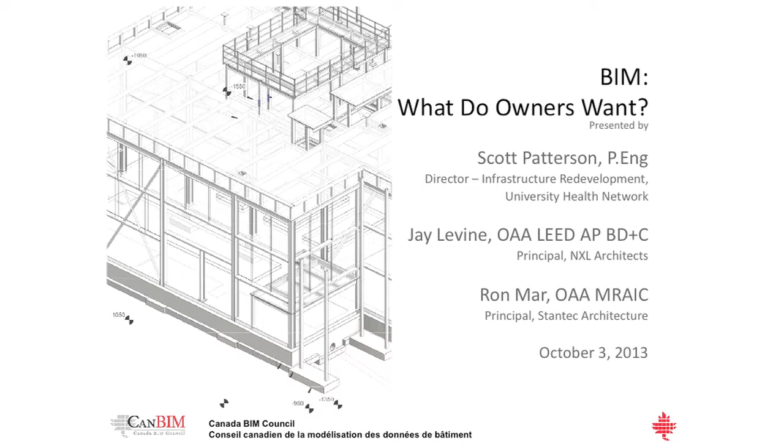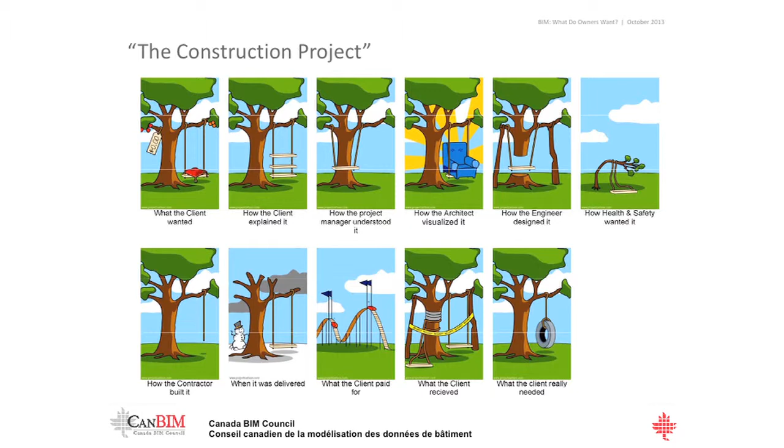I want to start with this old slide, and I'm sure many of you have seen this on the internet many times. It's been used from the PM Institute, about the disconnect between what the client asked for, what they want, and how everybody along the way interpreted it. One reason we get there is that we don't do a good enough job of explaining ourselves. Now BIM is a great tool to explain what it is we want, but you could flip that same slide around, and this just says what the BIM model is.

We find that happens a lot: when I, as the owner, say I want BIM, what does the architect hear, what does the contractor provide, and what do the facilities guys think that means? So I thought it would be clever to show you how that could be a double-edged slide.

Before I go too much further, I just want to get an idea - so I'm up here speaking as a client. Is there any other owners or building operators in the room? Just a couple? I thought I could be the guy that could speak for all owners, but I can't really. Somebody's going to keep me in check. I see one building operator in the corner. What architects? How many? Contractors? A few? And everybody else, I guess?

Right, okay, so let's have some fun. A little bit about who I am.

I work for UHN, University Health Network. We're a hospital organization here in Toronto. We have 4 hospitals across 8 sites and a total of about 6 million square feet - 2 million lease space and 4 million of our own properties.

We are committed to BIM, although we're just getting started, because we feel it will definitely improve our record keeping, help us plan our projects better in the future, find things to help us make improvements for energy cycling, tell us about what our buildings are doing, and the last great thing - reduce costs because we're going to reduce our risk.

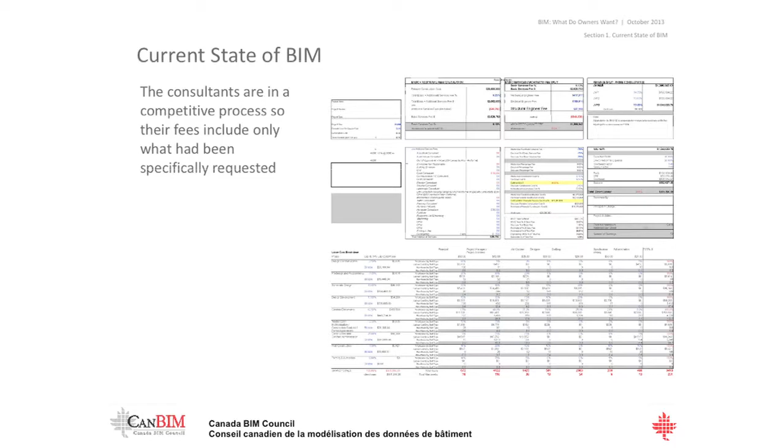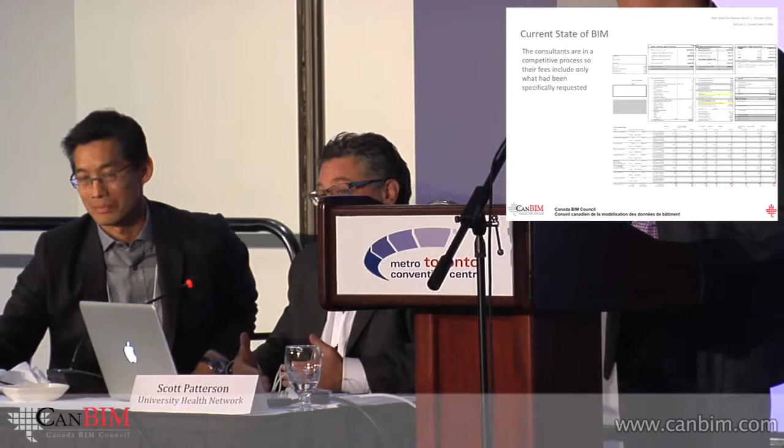So when design consultants who are pricing something competitively see that, we say, just like the contracting community looks at our documents and says, if it's not there, we're not pricing it. We say, if it's not there, as we're trying to figure out our fees and model this big team of civil engineers and landscape consultants and code consultants, and put all that together in a fee model that's supposed to leave us enough fee to last on a project for 6 years, BIM's not part of it unless it's specifically asked for. And we have yet to see it asked for with any specificity or with any degree of clarity.

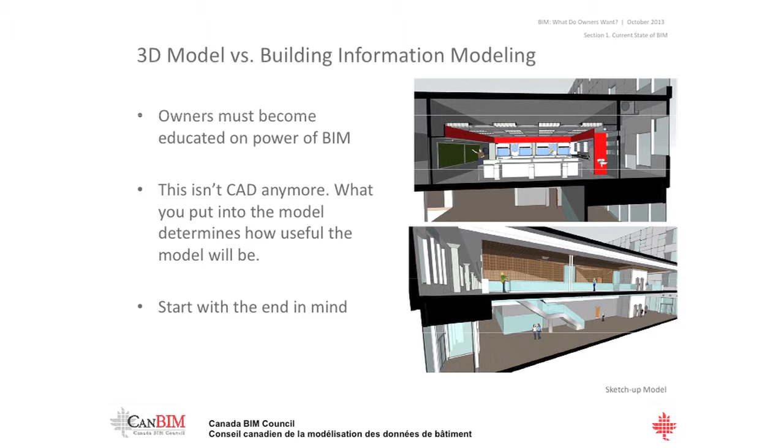So basically we know now that the owners have to become more educated with BIM, and if there's one thing that the last project has taught me, it's how much I didn't know about BIM, and I'm learning every day how much more I don't know about it. But this isn't CAD anymore.

The pictures you see on the side of the slide here are really just SketchUp models, pretty pictures. And I know a lot of people, at least on my side of the industry, think that's what BIM is - we're going to have a nice three-dimensional rendering of the drawing, we're going to be able to see the colors and see what the carpet is. That's useful for maybe a marketing point of view, but it doesn't get us anywhere near where we want to go.

And what we have also realized is you have to really start with what you want at the end when you start the project. We didn't realize that at the onset of this last project, but now we know what to do next time. So what do we want? Not sure I even know it all yet, but we're going to try to go through some of the items.

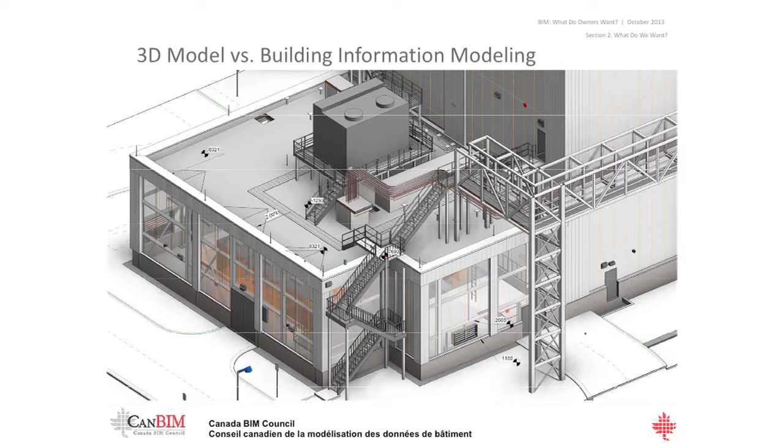What this slide is meant to show is, yes, it looks like just a pretty picture, maybe like a SketchUp, but there's so much more to it than that. Aside from the fact that it's got pure, accurate geometry and the information is actually there, you can go down deeper and pull away things and look at the structural, the nuts and bolts.

Most of you people in the room, this is not new. I'm not bestowing any new information on you guys, but it was quite an eye-opener for us to know that it's more than just something you can do a fly-through with, or show a donor, or do something like that. How many times did we ask that, Ron?

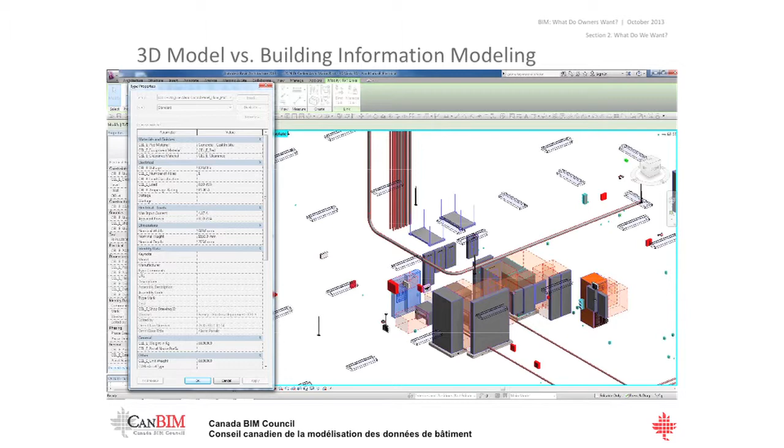A lot. But to the next stage, this is just to pull out purely electrical information of a part of the building, and then have the data on the side that shows all your information about what type of light fixture that is, where do we buy it from, can we have a PDF of the cut sheet for our facilities guys, can we have our maintenance operation manual embedded in this.

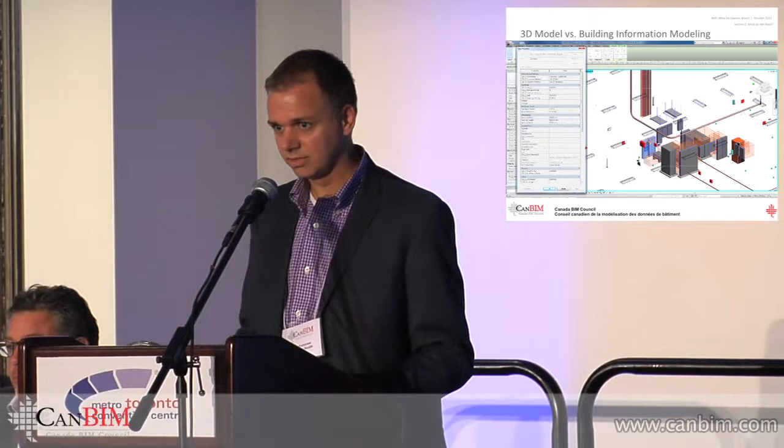That's the power that we now realize at UHN, that's something that we can grab hold of and do something with. The picture is great, but it's for after the life cycle of the building - know that light is from Lutron, and this one is from such and such, and this is how we got it, where we got it, and this is where we can get another one when it breaks down. To have that all in one big place, as opposed to my previous slide where you get the manual, throw it in the drawing room, and good luck finding it afterwards. So that's where we really see the things are going.

Some people in this room may know a fellow named Ian Trudeau, who probably takes a lot of credit for this drawing, when this is a structural part from our last project. But there's more to it than the construction interface and the clash detection, although this is - Ron, do you want to talk a bit about it?

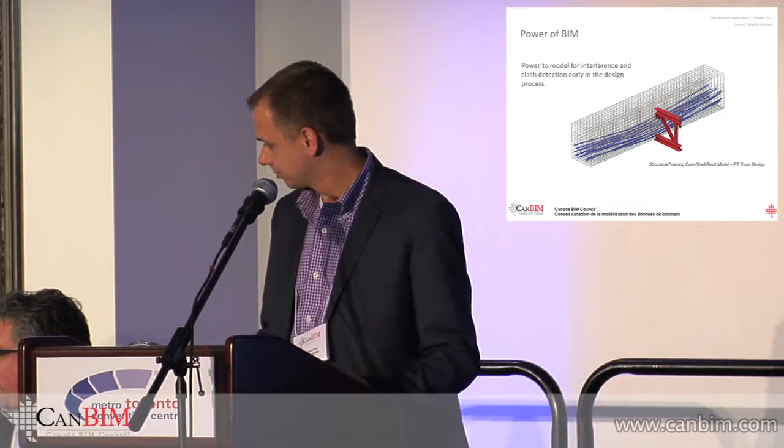Just also to step back, just to set the stage in this - Scott's describing a future wish list, and we're also looking at a bit of a history case here.

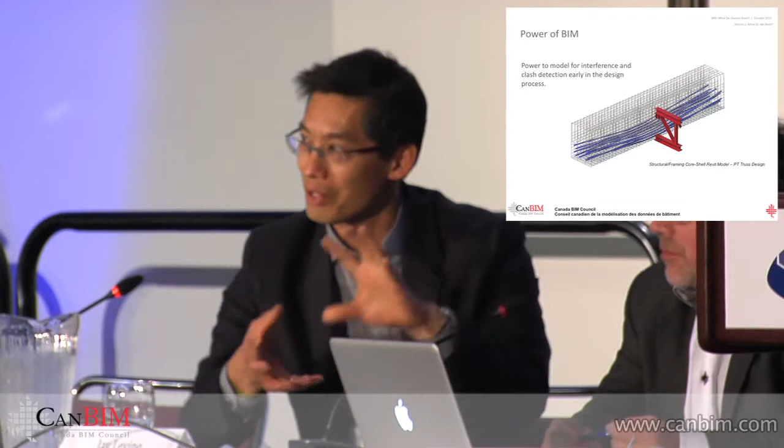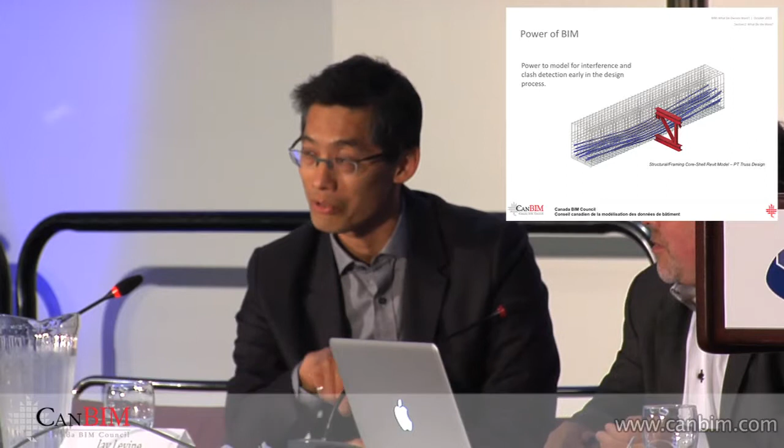Ian and Jay and I spoke a little bit about this project, the Krembil Discovery Centre, a couple years ago at another talk, and it was maybe a bit more. At that time we spoke about the process and what we did with the BIM model. In the context of what an owner wants, I think these next few slides are about what went on with Krembil, because I don't think we're there yet. There's a bunch of guys in this room, some people from EllisDon and Black & McDonald here who are also part of this project, so some of this is not new to them, but this first slide is literally just a design collaboration idea.

Early on with the Halsall Revit model, we needed to look at a lot of major structural and mechanical interference issues, and this is just one of their crazy Revit model diagrams looking at this gigantic concrete transfer beam and a post-tension condition we had to deal with. As architects, we wanted to see how many holes we could put through for sleeving in terms of getting our mechanical systems through. But this was just a design element in the process, and we can skip through.

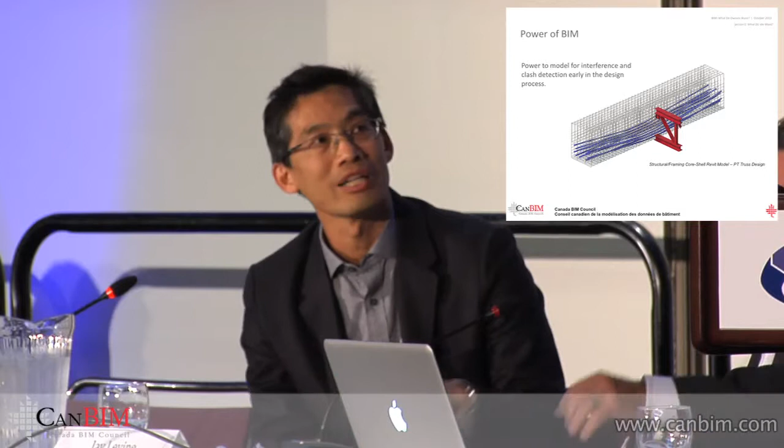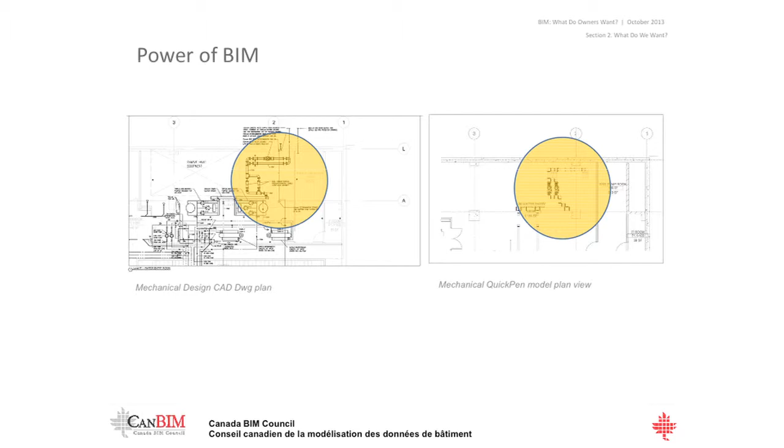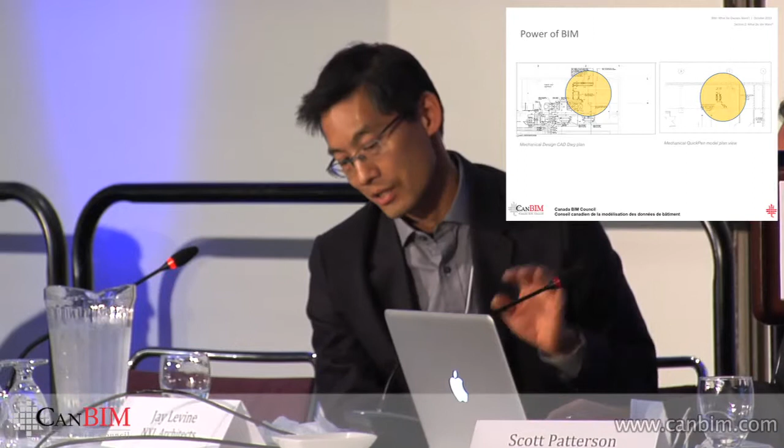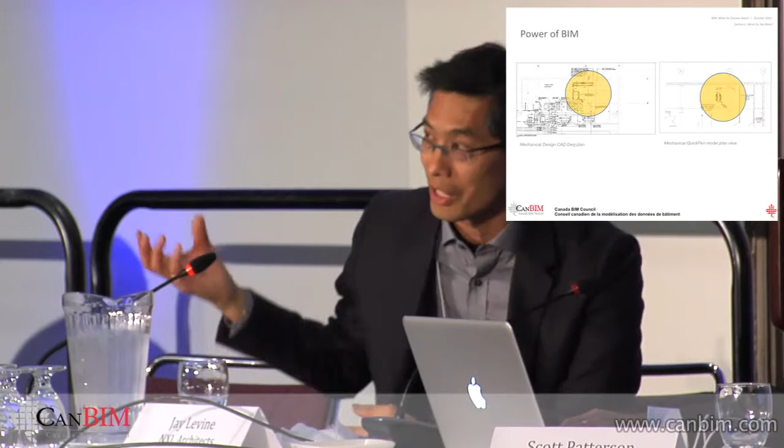The next one, you won't be able to see anything in this, but I'll step back again: the mechanical and electrical design team didn't embrace the Revit model on this project, so the structural team and the two architectural teams were working that way. This is a slide of sort of halfway to the proper way of working, where the left image is just the mechanical design team's CAD drawing of a particular element, and then what the Black & McDonald team and EllisDon were starting to do was look at bringing that missing BIM model component into it, and I think they were just using QuickPen at the time to develop a model.

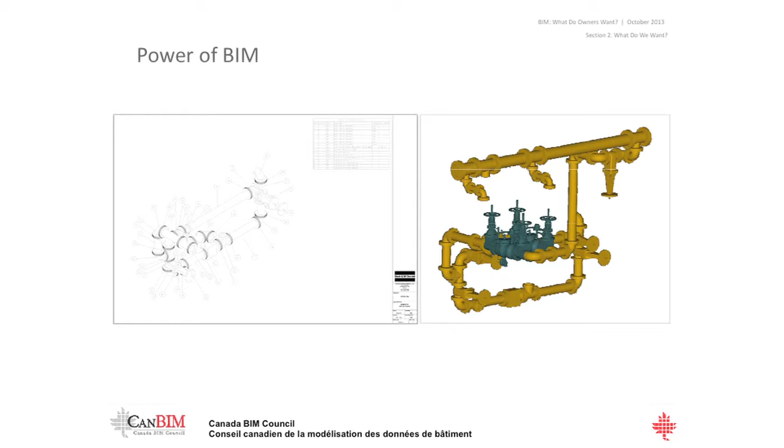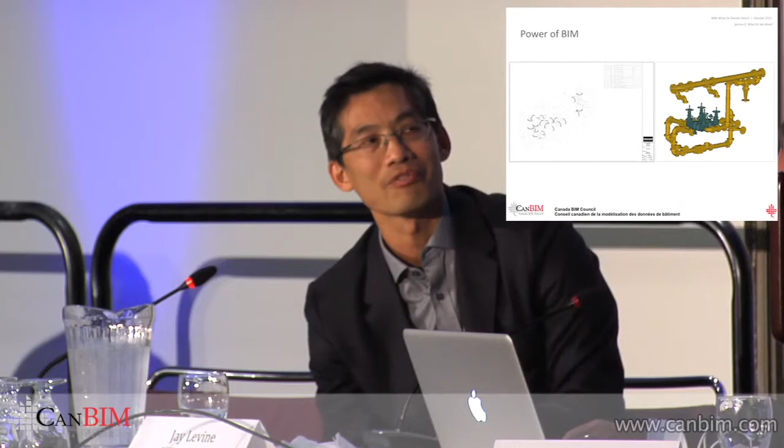Then leading to this spooling diagram, you probably can't see anything on it. It's a black and white spooling diagram on the left of this particular pump and pipe fitting array, but with the 3D model on the right, and that's where we want to get to. This is easy - the design, the fabrication, the construction, sizing, and getting it to site. But we want to be able to get that BIM information back to the owner and into a better model. And I want to get there because I don't want to pay one guy to do the drawing, another guy to do the drawing, another guy to do another. I want to pay once.

I'm selfish that way. These next couple slides, I'll give credit to - I wish this was one of my projects, it's not. It's actually a Skanska project from the US, but this is again going back to where we want to get to: utilizing the BIM model for prefabrication and the spooling process, because that is obviously something you can do, where you can lay out the drawings or the model in such a way that you can build your corridors in a warehouse where, in Toronto, we have weather delays, we have all kinds of trades dropping on top of each other.

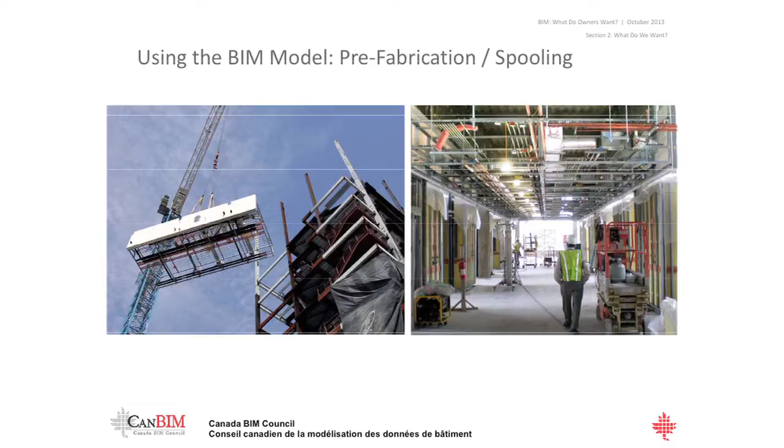Actually, go back one more, Jay. Just wanted to point out, on this one where they're hoisting up the section of the corridor, they have actually even installed one half of the drywall onto the side, which is always a pain in the butt to try to do once it's up, with pipes and cable trays and everything else in the way.

So this is just something, an efficiency that BIM can bring to our project, which, from my point of view, I'm going to see my project get done faster. I'm going to see hopefully less cost because everybody is coordinated ahead of time. The trades can be more efficient because they're working at waist level in a conditioned environment as opposed to on a scissor lift up on site, bumping into three other guys on other scissor lifts. So that's where I would like us to get to. That's one of the reasons why we're trying to embrace BIM.

And so the next level of where we wanted to get to once the building is up is the facilities operations. We're not there yet. I'm not going to try to overstate that we have all this done, but I want to get to this, because I really do feel that utilizing a BIM model that is connected to the BAS, the building automation system, and the facilities management system, that's the holy grail. Then you have something that you can really take advantage of.

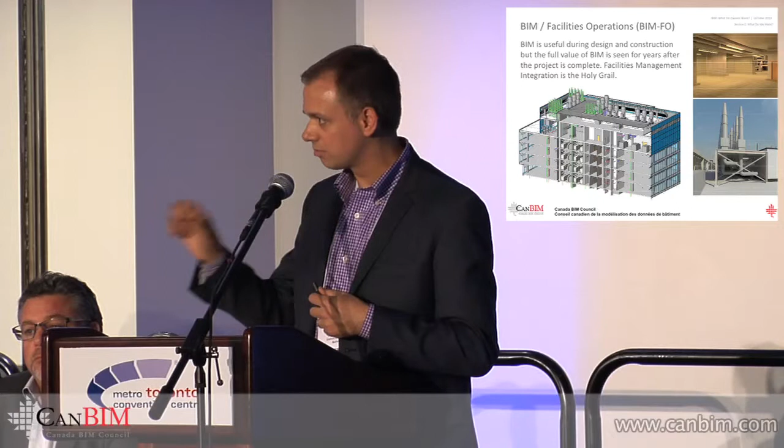See what's happening in your building in real time. If that pump needs to be replaced, I want to see that glowing red on the model. That's where I want to get to. I want the guy's BlackBerry to go off to know that he's got to go up there to look at something, and it all represented in one place.

What's really interesting is that Mars, as a progressive landlord, their intention with this model is to hand the base building geometry and information model to the tenants' design teams, and then require that they, at the end of their design process and construction process, hand back the model to the landlord. Our obligation is to, on behalf of the landlord, knit that model together so that at the end of the day, this entire building with multiple tenants that have a fairly significant density of scientific equipment, they can look at the entire connected load.

How many fume hoods are there on the building? How are they connected, regardless of whose fume hoods they are? Or if a tenant wants to put a new piece of equipment, is there somebody else's piece of sensitive equipment above or below going to interfere with that? Vibration, EMF frequency, that sort of thing.

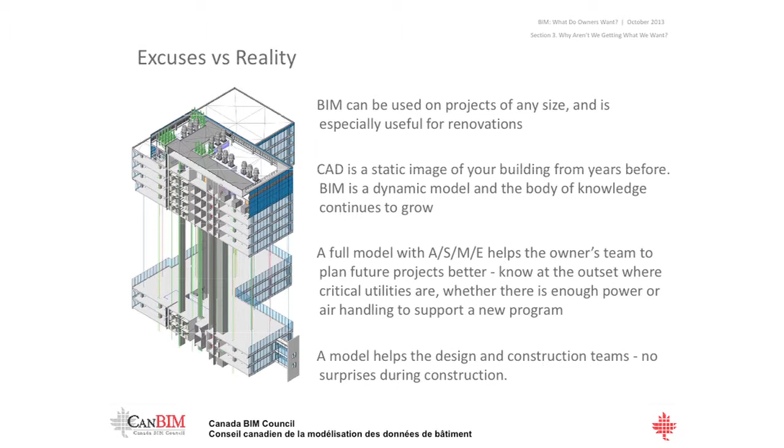But the facilities management part we just looked at, keep in mind there's more to the project than design and construction. The long-term facilities management is really where the power is. It can be used on any size and any scope of project, and facilities management goes for so much longer during the project life cycle, so I'm hoping these excuses won't stop us from implementing this in more and more projects.

Yeah, help me out, Jay. One other item with the previous slide: when we sat composing this, we looked at these excuses and realized they all come down to time and money.

Time and money in projects are always in short supply. But the interesting thing about the discussion between an owner and design team representatives is the feeling that with proper use of BIM through the life cycle of the project, overall BIM use reduces time and money, or at least, as a benchmark, it costs the same to do a BIM project. It just reallocates those costs and that time differently.

There is more time and more money spent up front in developing the BIM model. So there's more money in the project that gets allocated to the design group up front to do that work. But that investment actually saves time and money later on in the process. As we looked at this, we realized they're all saying the same thing. And we're here to say, having lived through a 6-year project, we don't agree, collectively.

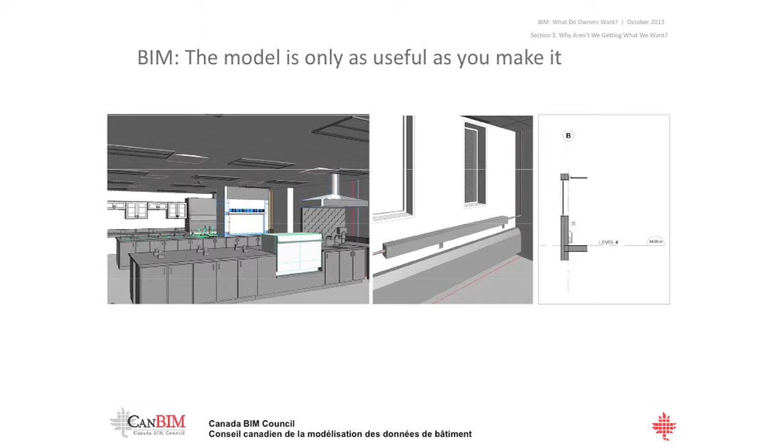Architects drew fan coil units as the cover in one location. Electrical drew it as the guts in another location. So the information is there, but it's not really hitting on all cylinders.

The lights look like they're dropped down from the ceiling, they look sort of like this. They're not, they're flush with the ceiling, but the first couple of attempts at it, the lights were several millimeters above the ceiling, and we kept yelling at the electrical guys saying, you haven't put the lights in. They said, no, we did.

But they were above the ceiling, so we didn't see them. So they said, fine, we'll drop them 25 millimeters down so we see them. They're not in the right location. Is the count right? Yes. Is the circuiting right? Probably, we'll find out. But it's still sort of early days.

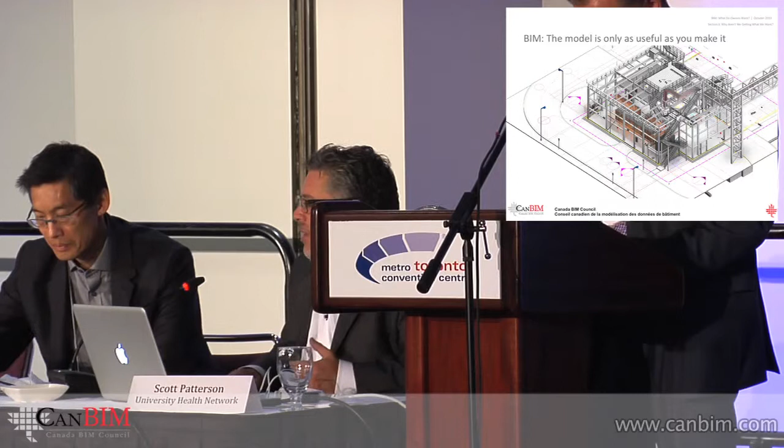Another project, very highly technical building, structural, electrical, and architectural are all modeling in BIM, right from the beginning. Mechanical, no, mechanical's working in CAD. So we're trying to coordinate information.

You can see the kind of CAD 2D layer ground floor plan that has the CAD information. This diagram's similar.

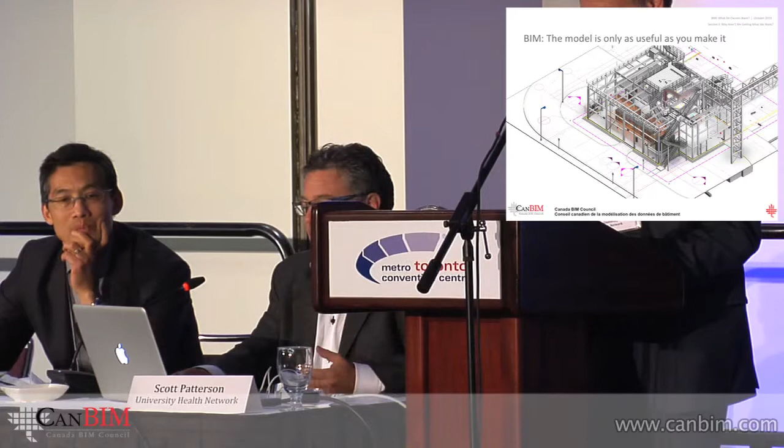We're trying to coordinate ductwork that's running through a trestle, and the electrical is really well detailed. The mechanical, which is the much bigger component, as architects we contend with mechanical stuff, and it takes up a lot more space than electrical.

And yet on this project, which you can see is almost machine-like, we're working with one hand tied behind our back.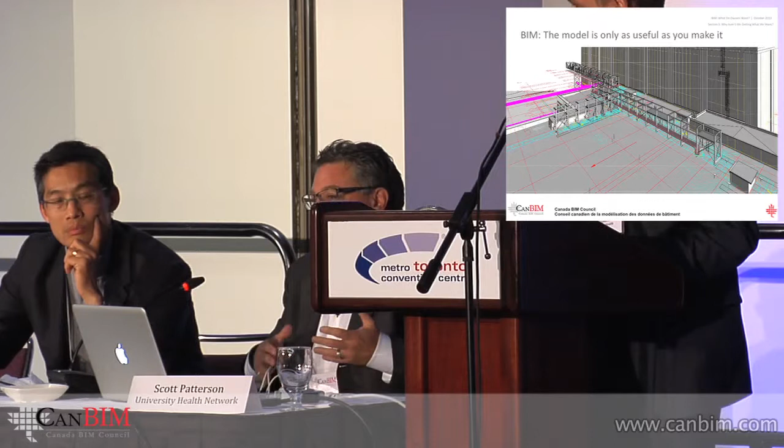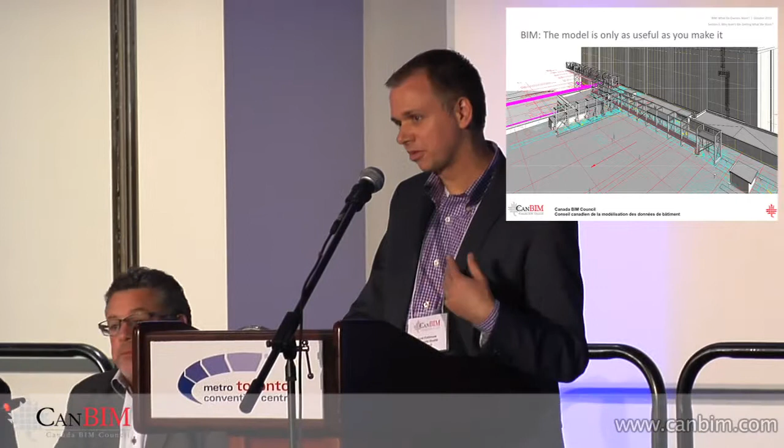Just to put that in context, one of the reasons why I'm not getting what I want is that the whole consulting community is not at the same place yet. Some of the people are lagging behind. Surprisingly, sometimes it's the mechanical guy. Surprising to me, because if anybody should benefit from 3-dimensional representation, it should be them, but not always the case.

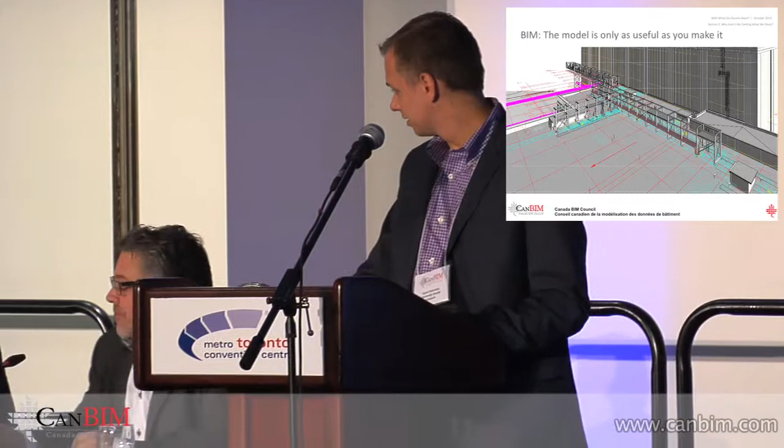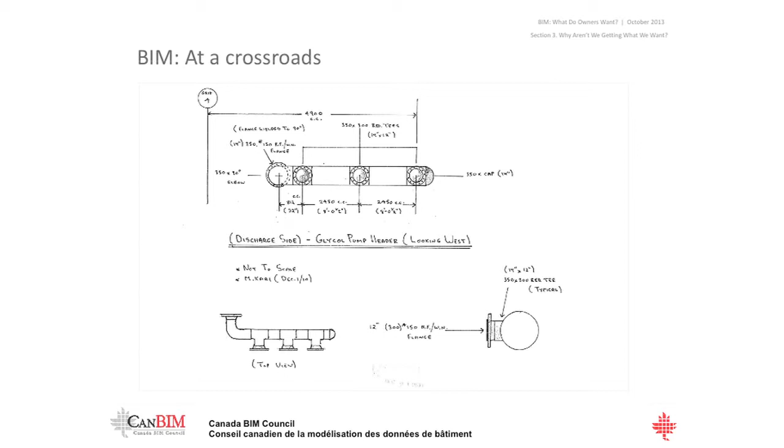Yeah, and that leads to the next couple slides. We'll still pick on the mechanical guys because most of them aren't here. But this everyone will recognize as a dumb old site doodle, but this also just went on at Krembil.

To be honest, at Krembil, the mechanical contractor team was very advanced, right? I mean, further ahead. Black & McDonald guys here, so...

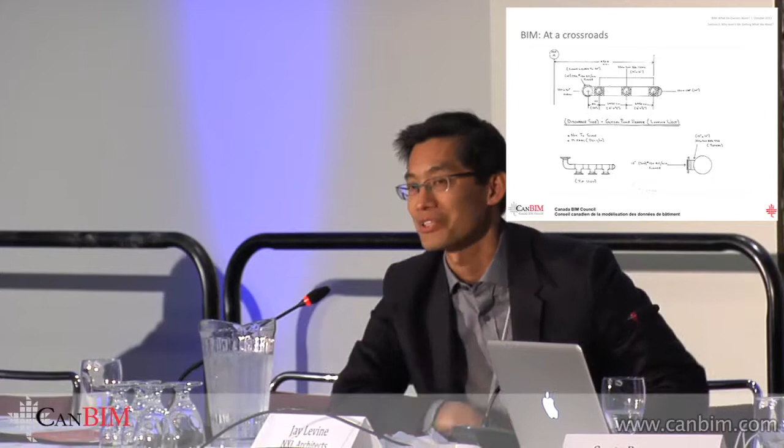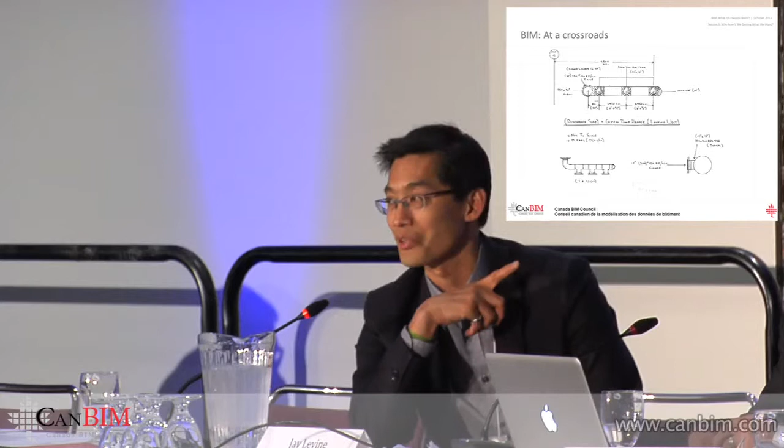And I think that's where everyone could see that the consultant design side needed to be at that same level, because this is sort of the equivalent of the CAD drawing, but this is really the site guy, one of the old site guys trying to do his little pipe layout drawing at the site, measured.

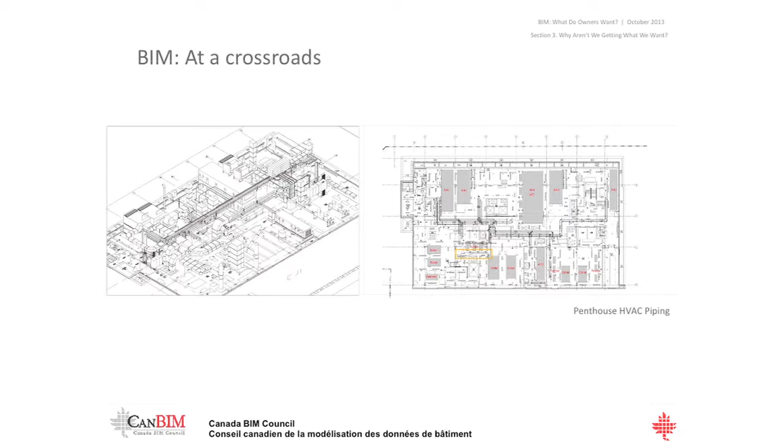Then you probably absolutely cannot see this model view, but this is Black & McDonald's Revit model of the mechanical penthouse. Huge forest of piping and ductwork in here, and all the air handling is there.

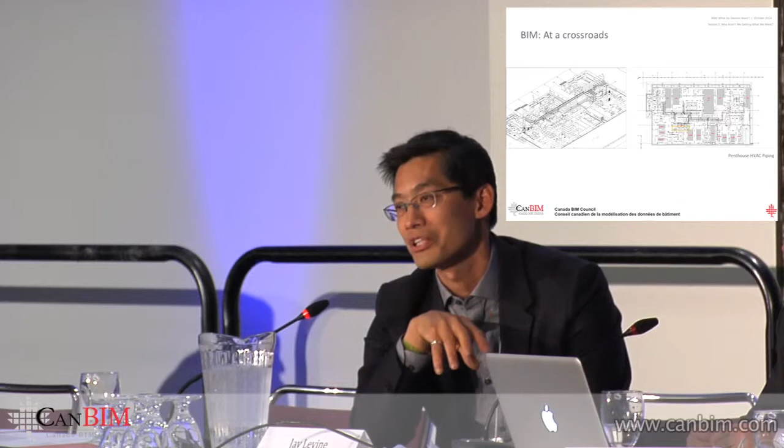But they had it modeled so everything was buildable and interference was kind of considered. And there's a little zoomed in here, that's that same area where that hand sketch was for that pipe, and then there's a spooling diagram.

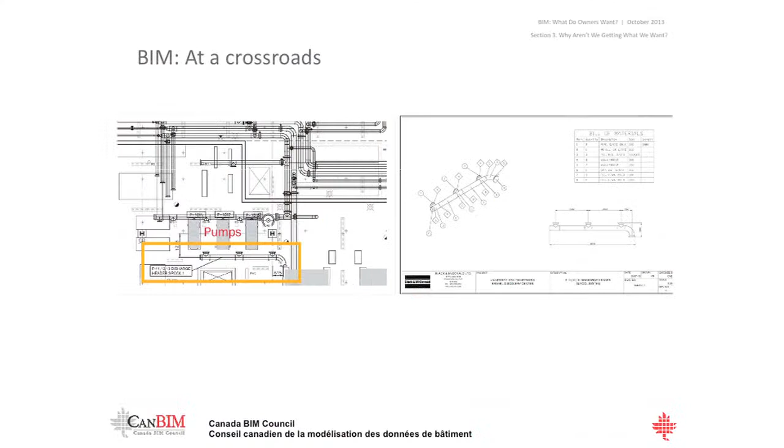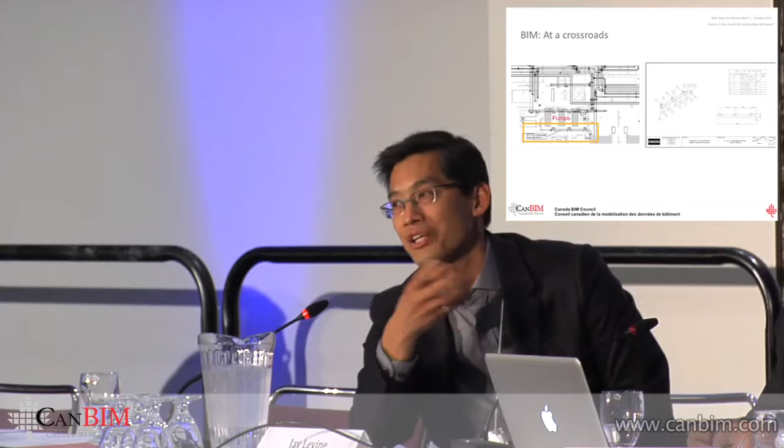So they made their way through it as constructors, but there's a clear lack of continuity. The design team could and should ultimately be part of that same continuum. We're handing off the same information. I think that's the next slide. Yeah, so I'm just going to go ahead.

One thing that's really not happening yet is that we, as a design community, aren't specifying in our documents the conduct and the input from the construction community. Our submittal specifications are great at compelling mock-ups or shop drawing submittals, and we have detailed specs about what we expect and when. But I think what we need is much more of a handoff.

The work that goes into the BIM model by the design team needs to be closely followed by the constructor team, and most importantly, a process followed to strip out certain information from the construction portion of the model—like when certain components were delivered, which constructors use for 4D timing and sequencing. The owner doesn't really care when that component was delivered; he cares what the component is. Embedding that information and handing it back to the owner is a step we as consultants have a role in shaping and authoring, and we're not doing it.

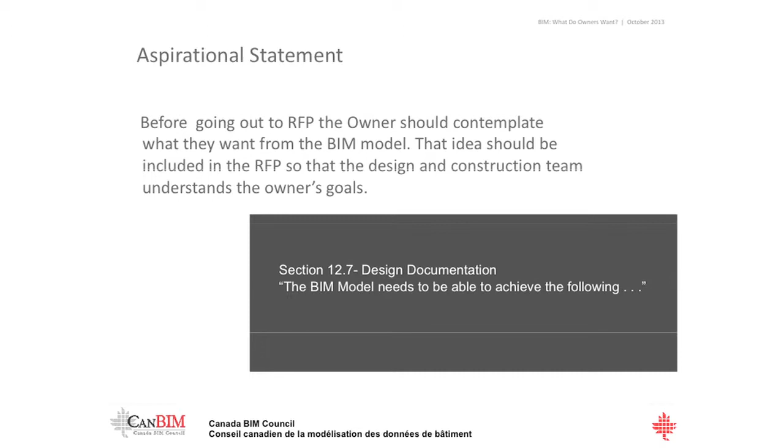This is one of Jay's—go back to the first one, Jay, you had a good story about this. Referring back to the slide earlier, section 12.7 of that RFP just asked us to describe our Revit and AutoCAD capabilities, but it didn't ask, compel, or guide us in how they wanted us to do it. From our point of view: tell us what you want and we'll do it, but don't just ask us what we can do, because we can do anything.

Given enough time, yeah, it used to be a checkbox on RFPs, right? Can they do this? Are they Revit enabled? And then likewise, someone receiving the RFP proposal will say yes, they're good, they're good, so they can go in this pile or that pile. I think it's obviously got to go way, way beyond that for everyone.

So I took a crack at making UHN's aspirational statement that I want to include in our upcoming projects, because we are going to be going for BIM. So, we do aspire to having a complete and integrated BIM model that includes all of our key building elements, structural, architectural, mechanical, electrical, for all of our facilities across our 8 sites and our 6 million square feet.

I see that model being developed probably by the design team, but there's a cycle to it. I want it to be transitioned over to the builder for their use during renovations or new additions or redevelopment. Then once it's created up to as-built conditions, back to our facilities team for their management and day-to-day updates. And then when I do a renovation, I have that up-to-date information to get back to the next design team. So it always continues to evolve and improve and increase.

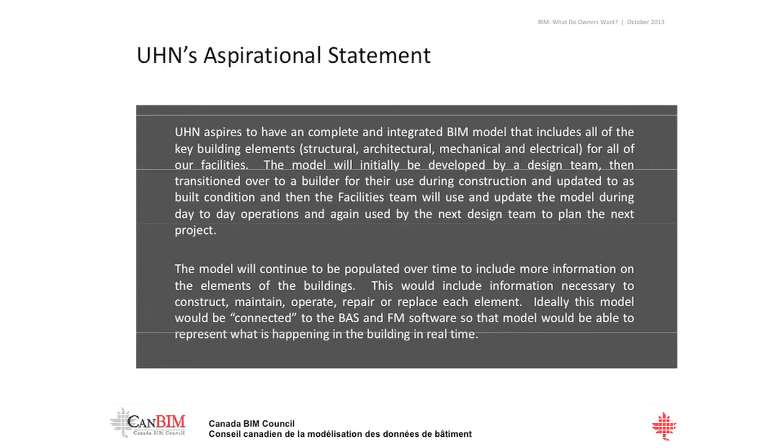So the next part of that is that I want to continue to populate this model over time with all the information on the elements of the building. I want to be able to know everything I need to know about, be able to construct, maintain, operate, repair, replace each one. And again, that holy grail, the tie to the BAS and the facilities management system. That's where I want to get to. That's what we aspire to.

Maybe that's too steep a mountain for me to climb this year, but every journey starts with a step. So that's where we're at. But I also want to hear if anybody else in the room is like, how do you get what you want? Because I'm still trying to figure it out. So if anyone's got ideas, come up to the mic and share them now about what the other ideas are, happy to listen.

Also, just to keep going and put this in a bit of context, you have to remember that Scott's coming to us in the room with, I'll call it a traditional RFP owner requesting services approach, and probably a lot of the people in the room have the joy, or not joy, of working on P3 type projects. So when you get into the, as design consultants, when you get into the design, build, finance, maintain model, and you're on a team...